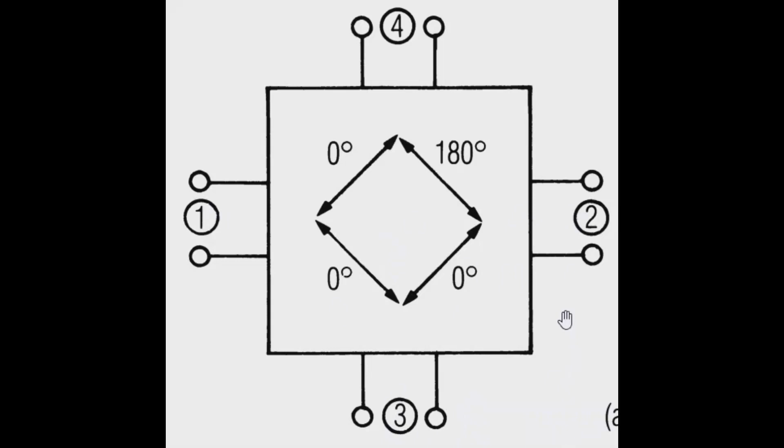Now, as it happens, these are the only 2 types of hybrids that can exist. That is 180 degree and 90 degree hybrids. Nothing else is possible. So don't waste your time trying to come up with a 45 degree hybrid or something like that. It can't be done, at least not as a passive, reciprocal, lossless device. Now, how do I know that? It comes from the mathematical properties of the scattering matrix. It shows very clearly that these are the only things possible. So that's mathematically proven. And I'm quite confident in saying that quite so absolutely.

Transformer hybrids like this were used throughout the telephone industry back in the early days of telephony, and they were useful for separating the user's voice from what he was listening to coming down the line. You didn't want to talk into your own ear when you were trying to talk to someone else. So you would connect the microphone and the earpiece to mutually isolated ports and the line to one of the output ports. And the 4th port could just be terminated. I understand these were actually unbalanced a little bit, so you could hear a little bit of your own voice while you were talking, but not too much.

So that's one way you can come up with a hybrid. I suppose you could still do this at relatively low frequencies up through the RF region, and it wouldn't surprise me if it's done fairly often.

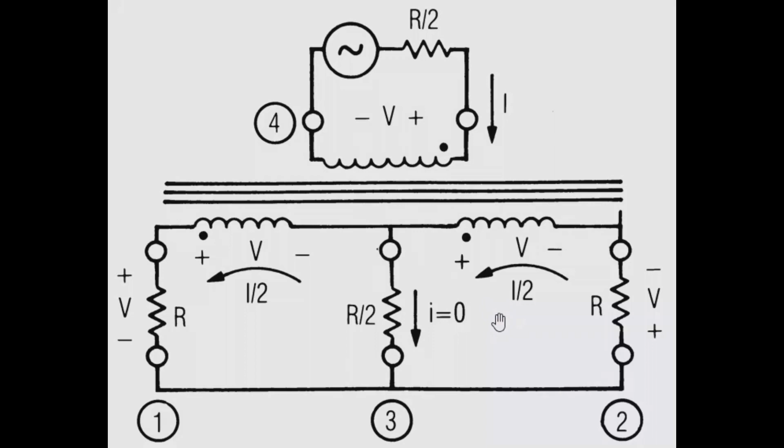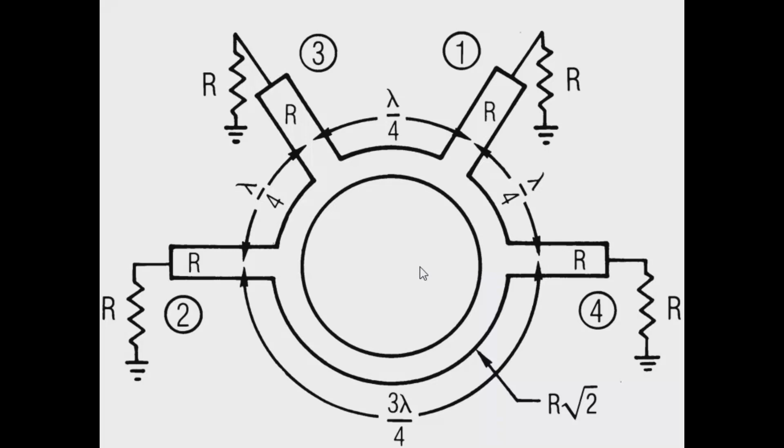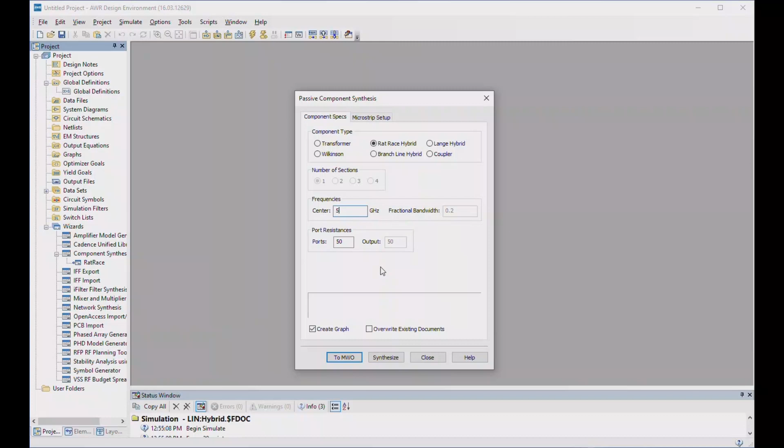Now let's go to the computer and design a rat race hybrid. I'm going to use the component synthesis tool, as I did once before, not because the rat race hybrid is so difficult to design, but it just speeds up the process quite a bit. So I'll select a rat race hybrid, and let's make it 5 gigahertz center frequency for a change. You can't select the fractional bandwidth. There is no degree of freedom for doing that. And of course, we'll keep 50 ohm port impedances. Now for microwave, I think I'll pick alumina, which is 9.8 dielectric constant, and you can see the boxes have been filled up here. So let me synthesize it and then send it to Microwave Office, and here we have it.

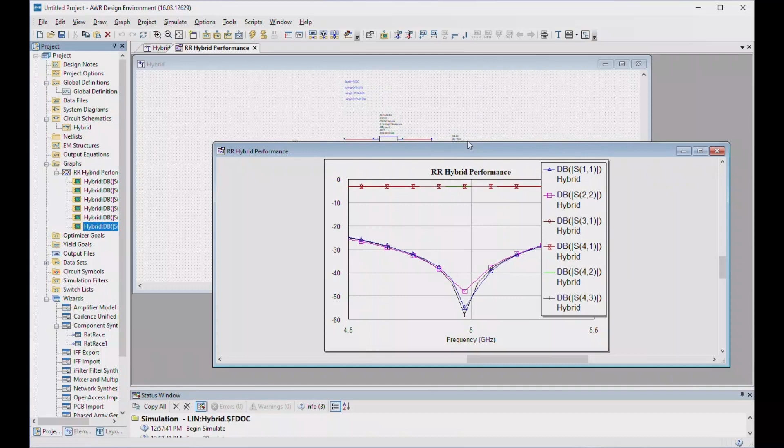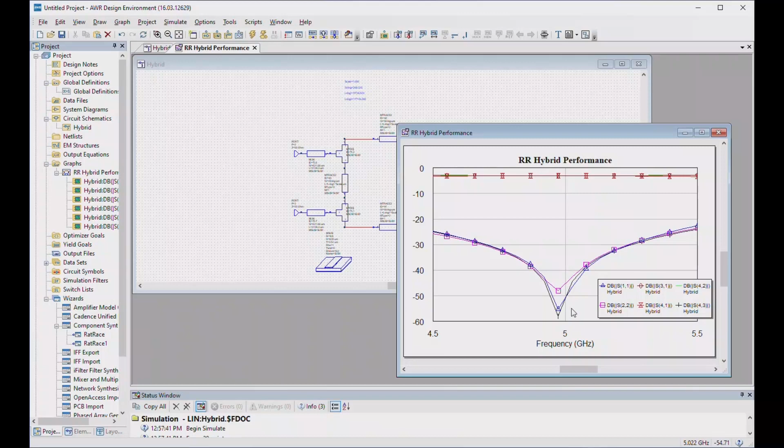And let me clean up the graph a little bit so you can see it. So here we have our power divisions along here. They're all about the same. It's 3.3 dB in this case, maybe 3.1 at the center of the band. And the isolations look pretty good. From 4.5 to 5.5 gigahertz, they're well below minus 20 dB in terms of return loss and isolation. This is over 4.5 to 5.5 gigahertz. That's 1 gigahertz centered at 5 gigahertz, so we're looking at 20% bandwidth. And this is about what you see with practical rat race hybrids.

Now, if we look at the line dimensions, which I've set up as variables here, the width of the ring is 268 microns, and the length is about 5 millimeters for the short quarter wavelength line segments, and about 18 millimeters for the longer segments. These are eminently practical values. So for something like 5 gigahertz, 10 gigahertz in there, and even to higher frequencies, these are very practical hybrids to use. And 20% bandwidth is nothing to sneeze at. That's fine for all kinds of circuits.

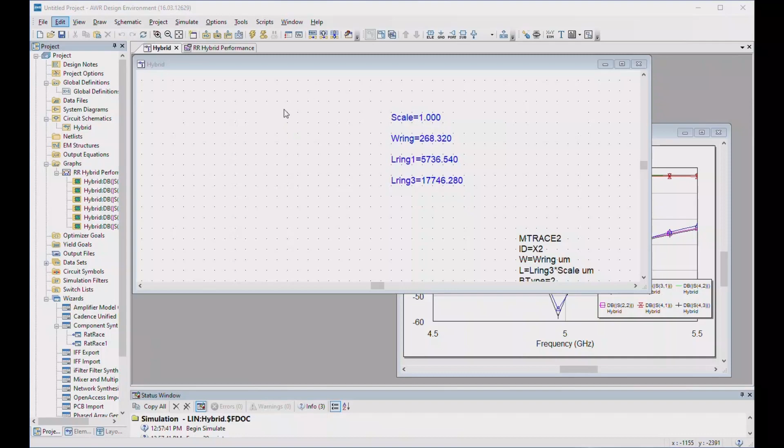Finally, as a preview of coming attractions, I thought I would show you this mixer using a rat race hybrid. This mixer operated at about 30 gigahertz. It was designed for the ACTS communication satellite, which unfortunately never was built. You can see the RF input and the LO input at the top and left side, and you can see the IF filter toward the bottom, and of course the rat race is obvious. The diodes, of course, are beam lead and they're too small to see.

This mixer was built on a fused silica substrate, dielectric constant about 3.8. And that made the size large enough to be practical for what at the time was a pretty high frequency. So here it is. We'll talk about rat race mixers a little bit more when we reach the subject of mixers.

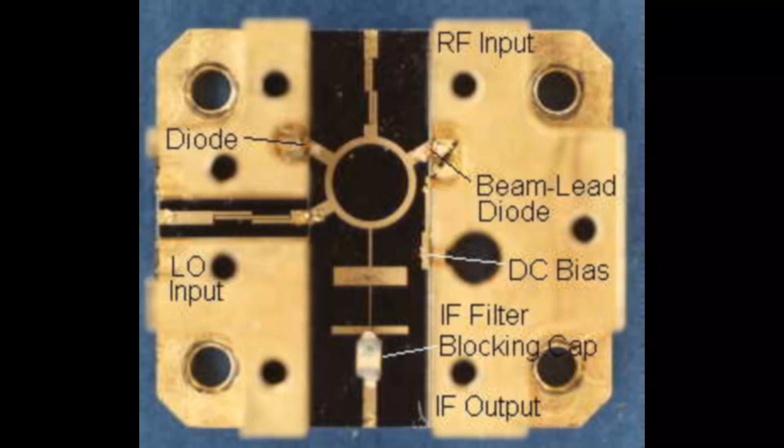Frankly, these are not great hybrids. There are other kinds that work a lot better, most notably the so-called Lang or Lange hybrid. I'm sorry, I'm not real clear on how that name is pronounced, but those have much better bandwidth and much better characteristics. They're a little harder to make though, and for narrow bandwidths, these tend to be used a lot more than you might think.

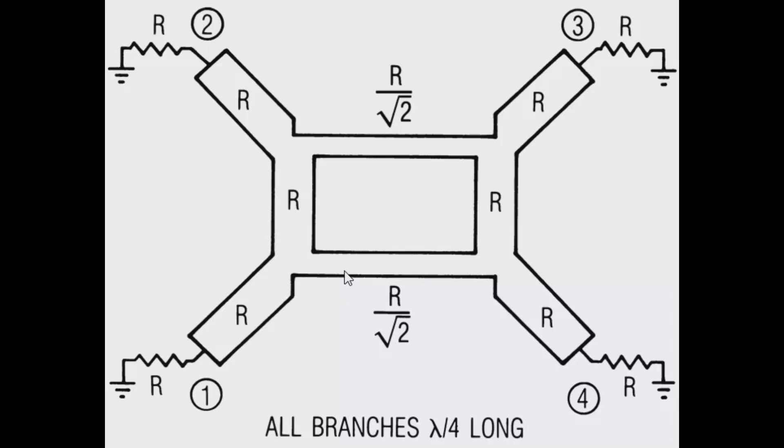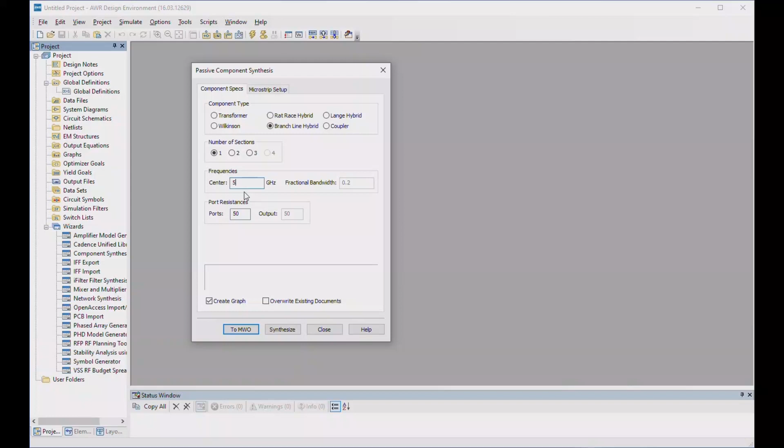Again, let's go to Microwave Office and design ourselves a branch line hybrid. Again, I will use the component synthesis wizard, not because the circuit is difficult to design, but just to save some time and hassle. So we'll select a branch line hybrid. Let's make the center frequency 5 gigahertz. Again, I like 5 gigahertz. Again, there's no degree of freedom to adjust the bandwidth, so that's what it is.

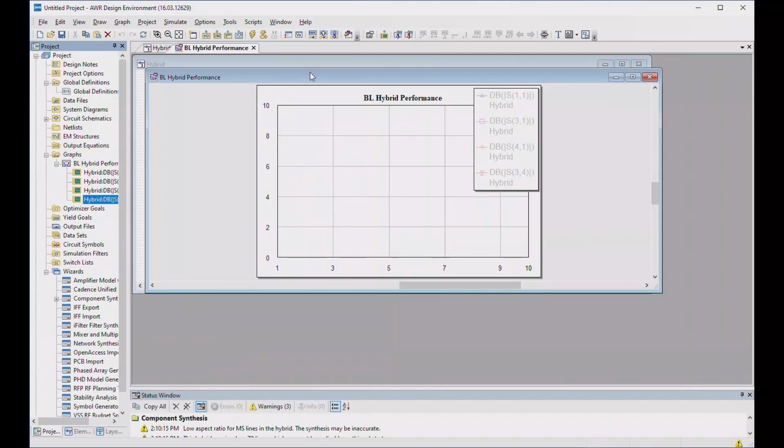Go to microstrip setup, and just for a change, I think I will make this on a Duroid substrate, 5880 in this case. I'll put it in mils too. So let's send it to Microwave Office, and here is our design. There is a hybrid, and let's take a look at the performance. And get this legend out of the way.

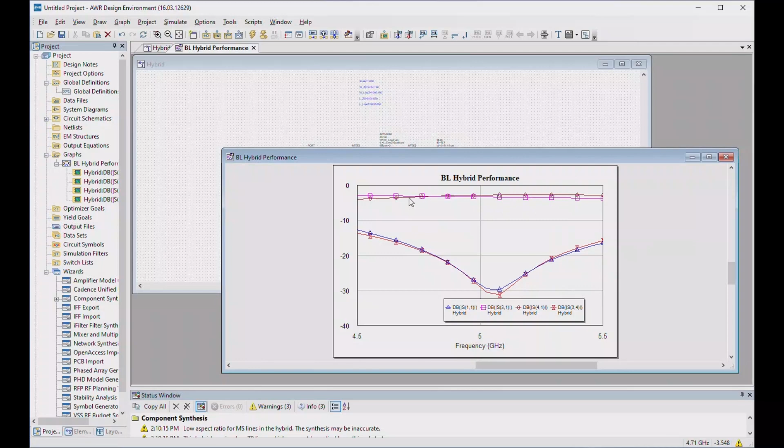And you can see that we don't have anything like that 20% bandwidth of the rat race hybrid. At 20 dB, it's about 4.8 to 5.3 gigahertz, so it's about a 10% bandwidth there, nothing terribly spectacular. You can also see there are different losses to the different ports. So you don't have anything like the balance that the rat race hybrid had. But on the other hand, if you need a 90-degree hybrid, you'll need something like this, or maybe one of the other types.

Now here's our circuit. I'm going to try doing a layout of this just for fun. Bingo, there it is. And so this is our port 1. If that's our input port, this is one output port, and this is another output port. So you can see also that even at 5 gigahertz, this is starting to get a little small, and it's on Duroid substrate, which is like a 2.2 dielectric constant. It's not a high dielectric constant substrate. So one of the problems we run into with these is, especially with these wide lines, you tend to have impractical dimensions at a not terribly high frequency.

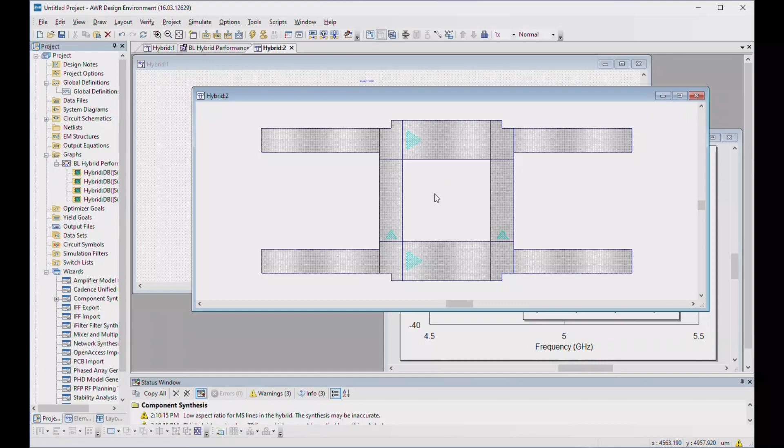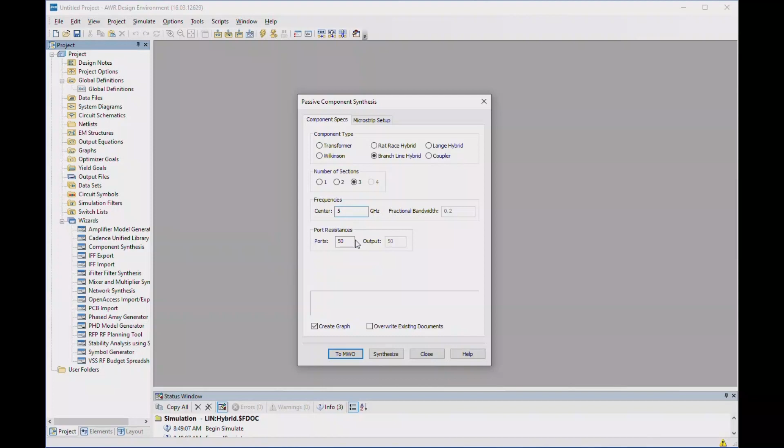Now there's one more point I want to make before we completely leave the subject of branch line hybrids. And that is that the branch line hybrid can be realized in multi-sections in order to get more bandwidth at the cost of a little bit more real estate on the circuit board, or the IC as the case may be. So let's try making another one here. You notice you can pick the number of sections up to 3 sections. We'll make it 5 gigahertz again, center frequency. And of course 50 ohms. And let's go on to the microstrip setup, continue to use our Duroid 5880, and I'll put it in mils as well.

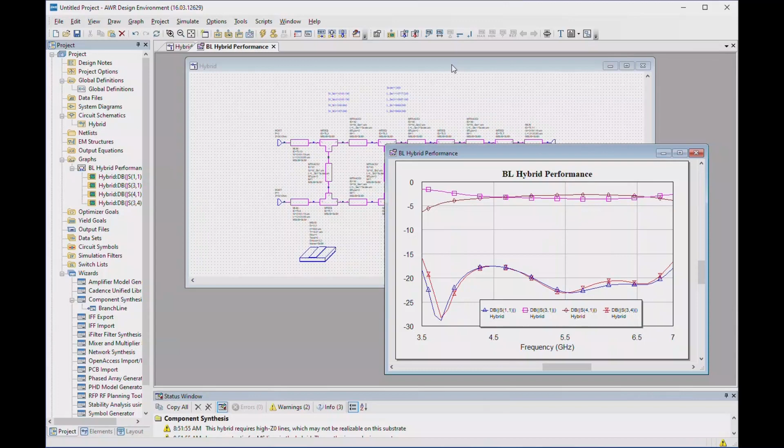Now, this isn't as nice as you might imagine. We've got 3.6 and 2.7 dB, that's almost 0.9 dB imbalance on it, which is tolerable for many things, but not for everything, of course. So this isn't perfect. Another thing that happens, I don't think you'll see it here immediately. I approximated some of the lengths of the branches, the cross branches here, so that it would lay out properly. That is, you wouldn't have a problem with one line being longer than the other. You can certainly see there'd be a problem if that happened. So you would have to meander one of the lines, but the difference wouldn't be that great, so it would be hard to meander. So this is probably not a perfect design.

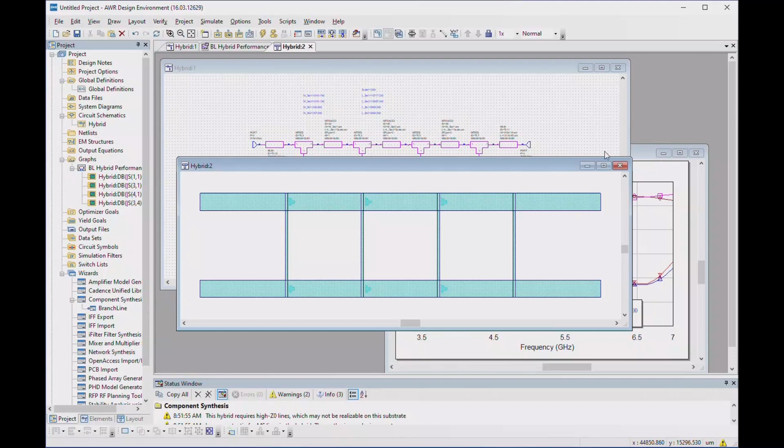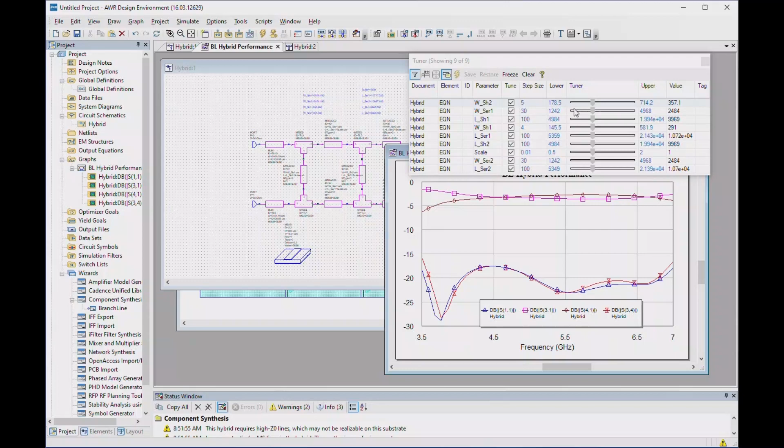What you can do is open your faithful tuner and start tuning. Although with this many variables, it might be better simply to run the optimizer, but we'll play with the tuner a little bit. I seem to find that changing the impedances of the shunt line seems to do a lot of good. You can see it has a strong effect on the balance at some cost to the bandwidth. And let's see, width of shunt 1 has much the same kind of effect, and so forth. So you can diddle this to your heart's content and maybe get the thing to work a little better. See, already I've got a below 20 dB return loss with about the same imbalance.

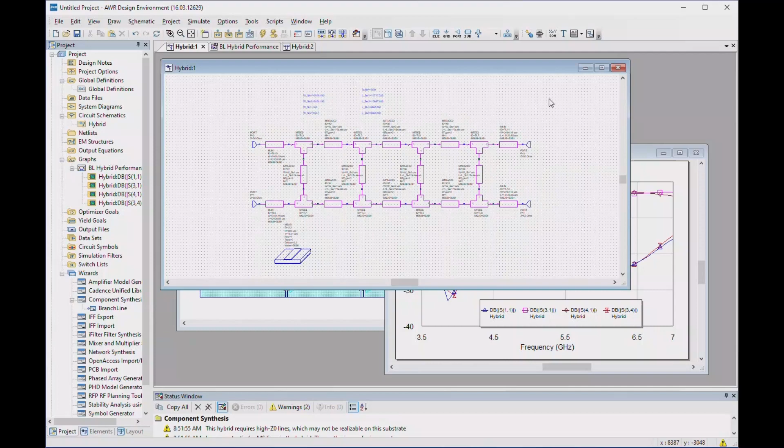So that's what you can do to make a multi-section branch line hybrid. It's not a terribly satisfying design, but it's very simple, it's very straightforward, and it will be useful for many different kinds of circuits. I hope that's a useful introduction to microwave hybrids. There's still one I need to talk about, which I decided I will leave until I describe directional couplers, and that of course is the Lange hybrid. That hybrid is actually not very different from a directional coupler, so in order to understand it, you'll have to understand directional couplers, so we will leave it till then.